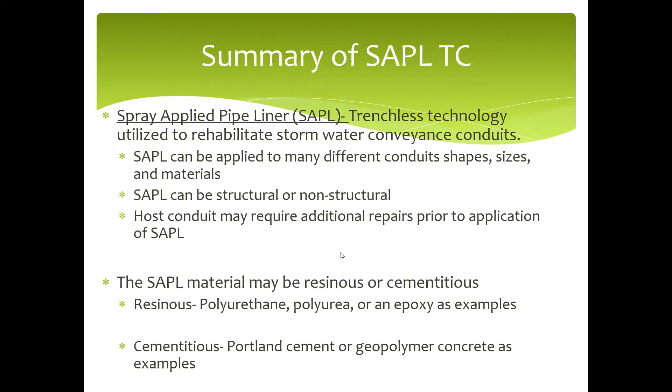The SAPL material may be resinous or cementitious. A resinous material is either a polyurethane, a polyurea, or it could even also be an epoxy. Cementitious material would be a Portland cement or a geopolymer concrete. A geopolymer concrete is a concrete that doesn't use Portland as the bonding agent, it uses aluminum and silicon.

All right, this should get us caught up. Example installations for the cementitious. Got some graphical pictures here.

Up in the right-hand corner is an applicator. It's a sled basically that's pulled through, and you can see over here on the left-hand side, you can actually see it where they're getting ready to pull it out of the pipe. So it's pulled through and it spin casts the material on. And in the lower right-hand corner, we've got a pipe arch shape that was spin cast, so it kind of just shows that it can be used in a variety of different shapes. However, most of the time it's used in round, which is what we see in the lower left-hand corner.

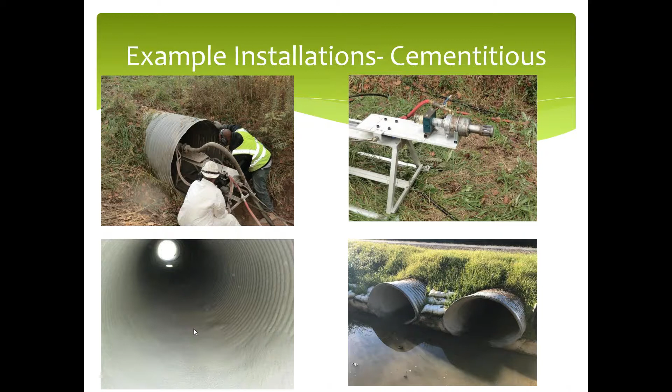And I did want to point out, you can see the invert of this pipe has got a little bit thicker material than what, say, the sides have. You can see the corrugations in the side and you can in the bottom. And that's the perfect example of where we had to come in and repair the bottom of this pipe prior to the spray-applied liners. I believe it was the same vendor, but he used a different material. He put it in the bottom, to fill in the voids, and then he applied his SAPL across the rest of the conduit.

Here's an example of a resin-based product. The key difference between a resin and a cementitious product is that this is applied by hand, whereas a cementitious product, in most cases, is going to be applied by that sled, that little spin cast applicator, unless the conduit gets to be of a size that's large enough that the sled wouldn't work, and then they would go to a hand-applied application. Again, in this scenario, on the left-hand side picture, we have the invert. You can see it is kind of flat. This vendor went in and repaired the bottom of the culvert prior to putting the SAPL on.

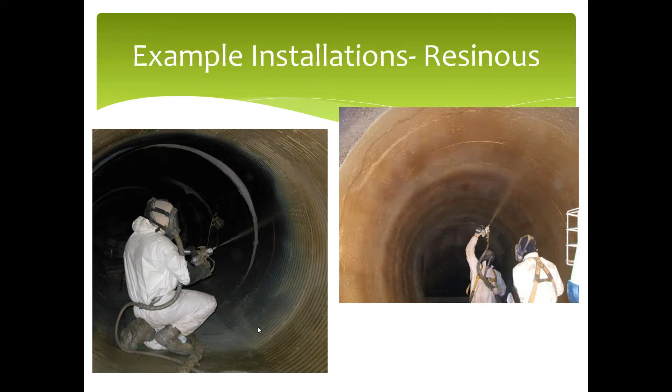So I wanted to do a quick poll here just to see how many DOTs are using SAPL that you're aware of. You might not even know, I don't. So we've got some options here. Ryan, are you going to take it from here?

Yep, I sent it out, Jeff. You just don't get it because you're a presenter, you don't see it. But seems like people are answering right now. We have you might be able to see these numbers too, Jeff, on the right-hand side. Click on poll, you can see the current graph.

We have 46% saying yes, 35% don't know, 11% maybe, 8% no. Well, that's encouraging, looks like the majority has used it and they are aware of it at least. Great. Okay, I'm going to move on to the next slide.

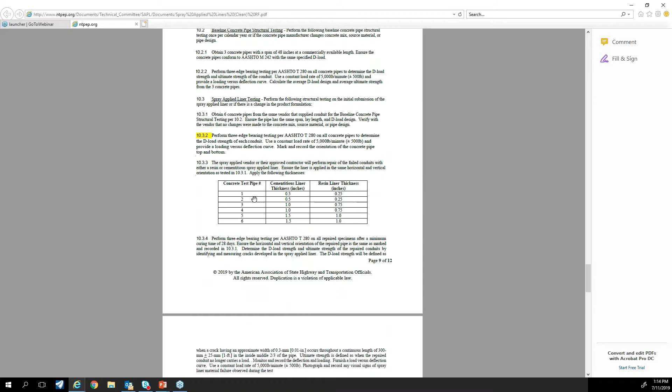Where we could, we always tried to go with an AASHTO spec since we are AASHTO. You can go through here and read this at your leisure, but it is pretty inclusive. There's lots of information in here. Some of it's boilerplate information that's pretty common to all the NTPEP plans, but then there's also some unique stuff just for the SAPL.

Okay, Jeff, we have a question. Yes sir, I'd like to take the question now. The question is, can the pipe have moisture in the bottom when the SAPL is applied?

Great question. So it really depends on the material that's being applied. In most cases, the answer is no, it cannot have moisture, it needs to be fairly dry. Some vendors will tell you that they can apply with some moisture. Other ones will tell you that it has to be completely dry. So it kind of depends on the vendor and the product.

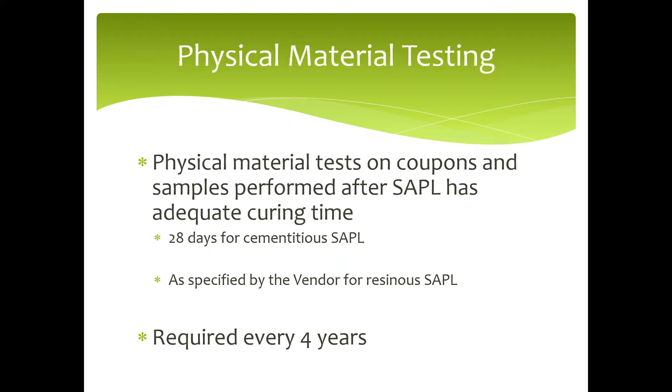Now this physical test for both cementitious and resin is required every 4 years. That's a frequency we agreed to with the vendors and the DOTs, and that's in our work plan.

Now the structural testing is a little bit unique to our work plan because we had to put our heads together and think about how we were going to test this material for structural capacity within a lab environment, so we came up with a couple different methods. This is performed initially at submission. Once the product is submitted, they don't have to come back and re-perform this test because it's expensive, so you only have to do it one time initially, or if you modify your formulation—in which case you have to go through all your physical tests again, then come back and do the structural test.

So we have two different methods: Method A and Method B. Method A is simply a D-load test where we take a 48-inch reinforced concrete pipe and crack it in the D-load test initially, just a bare pipe. Then we'll have the vendor come in and apply their liner in different thicknesses, let it cure, and come back to do another load test, which shows us if we have an increase in capacity or not.

Method B is what we call the parallel plate test. It's generally applied to a more flexible material, and we apply that in a 36-inch and 48-inch removable form—what we deemed in the work plan as really cardboard sonotubes when we were thinking this through. They apply their liner material in there, we let it cure, and then do the parallel plate test, which basically deforms the pipe vertically by at least 20%, and we see if there are any deformations or issues during that deflection.

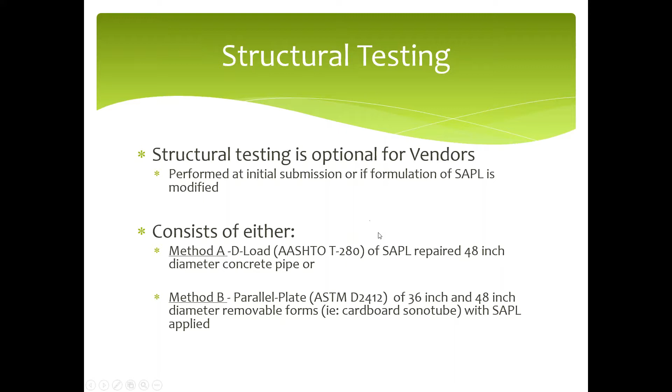To date, Method A has been the only test that vendors have chosen. Method B—no one has chosen that yet who has submitted through our program. So I won't talk a whole lot about B, but I'll dive in a little more about Method A.

So Method A, again, you're looking at a 48-inch reinforced concrete pipe. The first thing we're going to do on an annual basis, according to the work plan, is get a baseline D-load for that pipe, and then we get a baseline ultimate load for that pipe.

The work plan says you need to go out and get 3 samples of pipe from a vendor that's commercially available D-load. It could be a 1,000 D-load pipe, 48-inch, whatever's available near the testing lab. They come back and perform the actual D-load test, and then keep loading it until they get to the ultimate load test. The ultimate load test is where you no longer can carry a load, essentially.

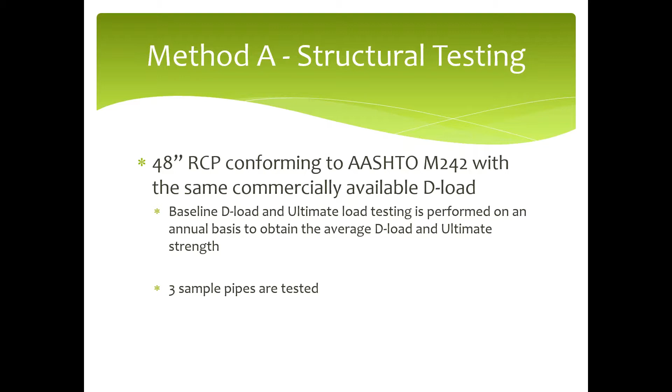And that establishes our annual baseline D-load and ultimate averages, so we know what's coming from that vendor should be around that ballpark figure when we are going to perform this for our spray applied liners.

So when we get into this for each of our SAPL liner vendors, we'll go out and get 6 of these 48-inch reinforced concrete pipes from the same supplier who gave us the pipe for the baseline test, get the same D-load designation, put that in the load frame, load it up, and generate the 0.01 crack.

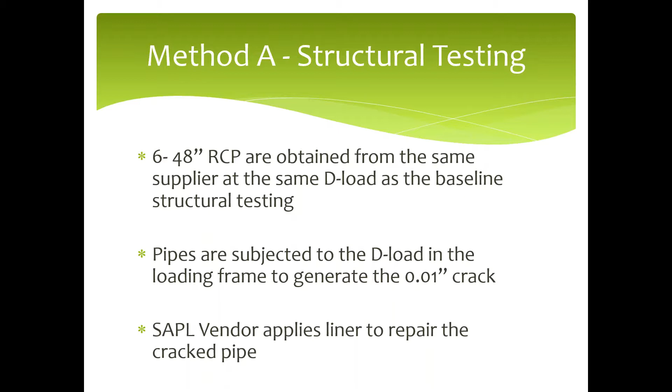That's the D-load test. Once we get that crack, we'll take it out of the load frame, and then the SAPL vendor will come in and apply his repair to the cracked pipe.

He'll do this for multiple different thicknesses. We have a 1/2 inch, a 1 inch, or a 1.5 inch for anything that's cementitious. For a resin-based liner, we have 0.25, 0.75, and 1 inch thickness.

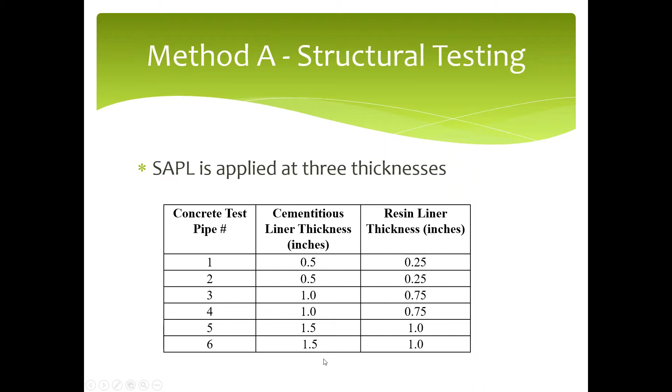And they'll have to do this to multiple pipes, hence we have 6 -- 2 pipes for each of these thicknesses. So he'll apply that thickness, let it cure, and then we'll put it in this D-load machine and basically test it to D-load.

And the important thing -- the D-load this time for the 0.01 crack is going to be in the liner itself. It's not going to be in the pipe anymore because the liner is now carrying that load.

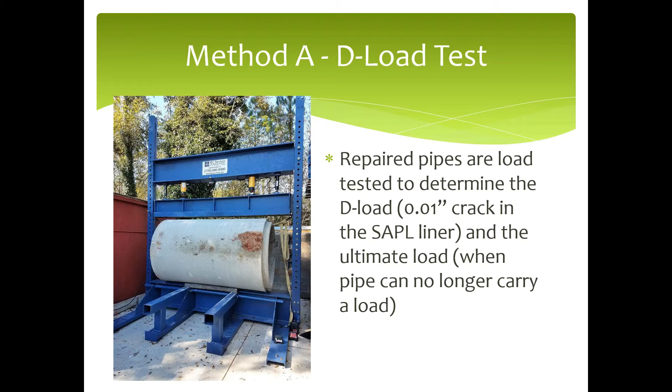And once we get to that, we're going to continue loading until we get to the ultimate load, which again is when that pipe with the liner can no longer carry a load. We record all that information, and that's what's reported through Datamine.

Hey Jeff, we got 2 questions. If it's good, stop and pause here for those questions. Perfect, all right -- they're not specifically about D-load, but they're related to the testing.

So the first question we have is, does the work plan include any chemical tests that evaluate the environmental impact of the product, such as leaching?

Does not. The only thing it would have is a durability type test, and that's it. There's nothing for leaching at all. No.

Second question we got here: are the vendors required to resubmit for IR to see if they've changed their formula?

That is not in the work plan. So no, they are not required to do that in the work plan.

Thanks, Jeff. That's it? Okay. Those are the only 2. Right, keep the questions coming, this is good.

Okay, so Method B -- I'm not going to go into a lot of detail about this, but we do have a whole host of pipes again. We have 8 samples at this point, and these are the forms, i.e. the sono tubes, in 2 different thicknesses, or 2 different sizes, of 36 and 48, and we have 3 different thicknesses: 0.25, 0.5, and 0.75.

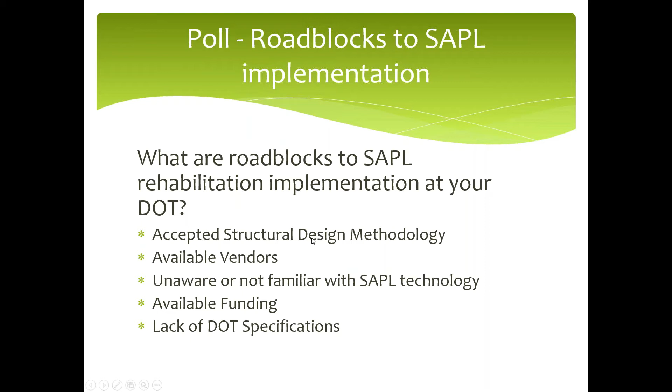Okay. All right, that was definitely a good segue into this.

As we sat around writing the work plan and thinking through how we're going to do this, we recognized that there's no standard way to design these, no standard AASHTO way. And if you talk to the vendors, they all seem to have their own different way of designing things structurally. In some cases they're the same, in some cases there's a hybrid, some cases they're not. So this pooled fund research project has been active for about a year and a half, and it's about midway done. The goal is to develop structural design methodology for spray applied liners.

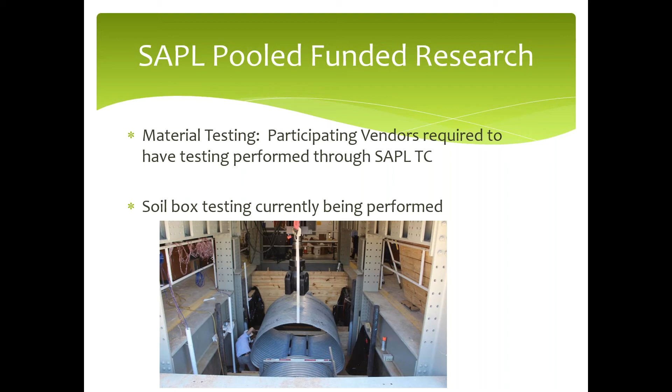Currently, soil box testing is being performed, and here's some pictures of them loading the pipes. They're looking at two different shapes: a pipe arch shape, and a round shape. The round shape is a 60-inch size, 12 gauge, with a corrugation size of 2 2/3 by half. The pipe arch shape is a 71 by 47, with similar corrugations.

One thing that's unique about this pipe is we had a good discussion on how we wanted to handle the invert of these pipes, because we're trying to really focus on what the liner is providing strength-wise. So they fabricated this bottom here, and basically, it can come out. It's bolted, you see these bolt patterns here, looking at the bottom side. So once it's put into the ground and installed, that bottom can be unbolted and the plate removed before the thing is spray applied.

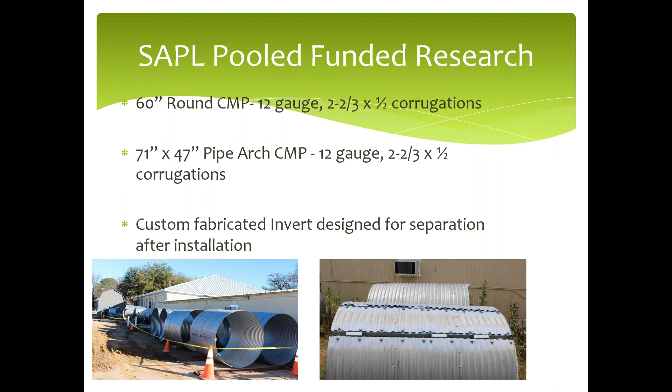So it's somewhat unique. The control pipes are being tested right now in July. It got pushed back a couple weeks. Basically, the researcher, we really were shooting for an 85% compaction in the backfill, and he did a great job installing the pipe, but he ended up with like a 95% compaction. We collectively thought we really wanted to shoot for that 85 to give it a low strength backfill, to try to throw more load into that liner that we're putting in there.

So the control pipes are going in now. They're getting tested this month, probably getting loaded this week. After that's completed, we're going to throw in another set of pipes, starting with a resin-based product. The reason we did the resin-based product first was mainly because of the curing time. You can apply it, it cures a day or so, then they can immediately load the pipe. With the cementitious product, we have to wait 28 days after it's applied for it to get its full strength before we can do the load testing. So we're shooting for July, probably into August, for the resin-based product, and the cementitious will be later in the fall.

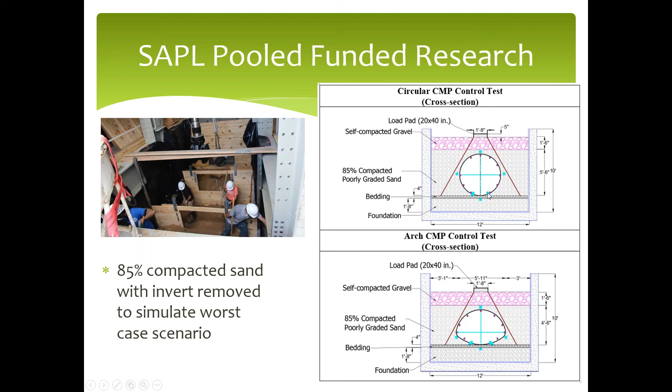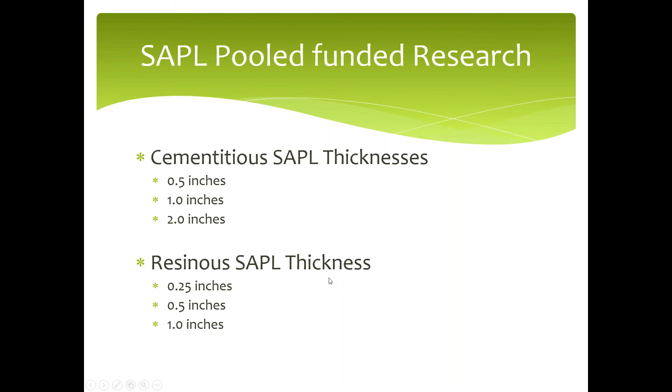For this research, we're going to test a cementitious SAPL and also a resin SAPL, with different thicknesses. These are slightly different than what's in the work plan through NTPEP, but we landed on a 1/2 inch, a 1 inch, and a 2 inch for cementitious. The most common thickness we're seeing across the board is about 1.5 to 2 inches. I've seen a lot of cementitious vendors come in with calculations saying it would work with, say, a 1 inch or even less, so that's kind of why we bracketed around those numbers. Resin-based material is a little different in its physical properties, so it requires a thinner application: 0.25, 0.5, and 1 inch.

No questions yet, Jeff. We'll give it another 30 seconds here. Okay.